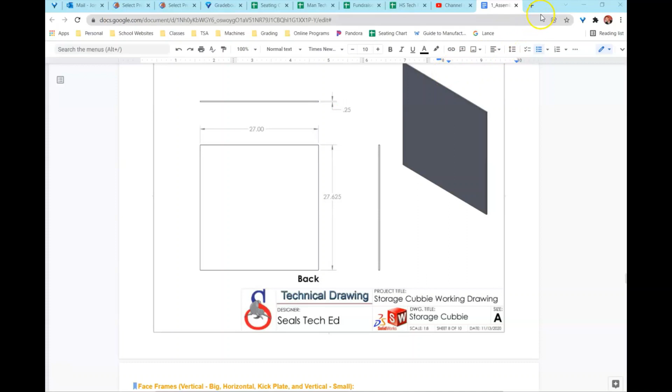I'm going to start with this simple back piece, and I'm going to pull this to my other screen. And in SolidWorks, I'm going to create a new part file. All of these parts are in IPS, or inches, so you can double check in the bottom right-hand corner that your screen defaults to that.

And since this is the back, I'm just going to draw this on the front plane, and I'll make the origin right here in the bottom left-hand corner. So I'm going to draw with my rectangle up to the right, and then it says it has an overall width of 27 and an overall height of 27.625.

Your computer is going to default to only 2 decimal places, but I will change it to show the exact amount of decimal places each time. That way, if you're busy and not hearing what I'm saying, you can actually see what it is on the screen. So it's 3 decimal places.

Features tab and hit Extrude. And again, it doesn't matter if you go forward or backwards, but this is going to be a 0.25 thickness.

It just says that it has a default material. You can change this to a wood type or whatever material you want. I'm just going to leave mine as default.

File, Save As. Find my Storage Cubbie folder, and I'm going to name this Back. And I can close out of that.

Let's continue here. The next piece is going to be all of the face frame pieces. Now, you might have no clue what a face frame is, so I'm going to scroll back and kind of explain. So on a cabinet or any type of furniture that you normally make, you have all of your side pieces and your internal pieces, but then they put this extra trim that goes on the front.

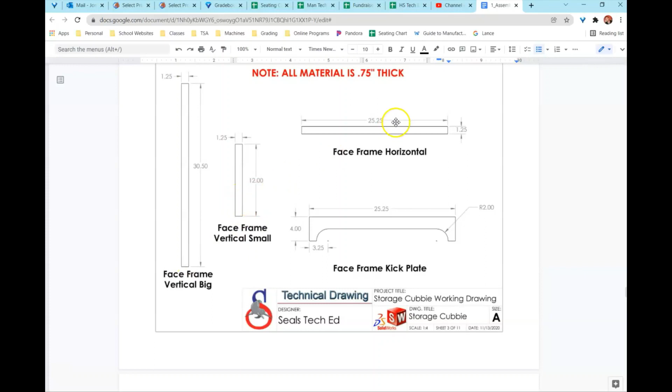So all of these tiny little pieces floating here are face frame pieces. Since they are all pretty small, I have them all drawn on just one page here. It says note all material thickness is 0.75. So you can see here there's the vertical face frame, the small one, the horizontal one, and then what's called the kick plate, and that's this bottom piece right here. So it's right here in the front.

So these are all individual part files. So once again in SolidWorks, let's make a new part.

I'm just going to sketch right here on the front plane, drawing with my rectangle tool from the origin up. I'm going to start on the left on that page. The first one here is the vertical big face frame piece, which has a height of 30.5 and an overall width of 1 1/4.

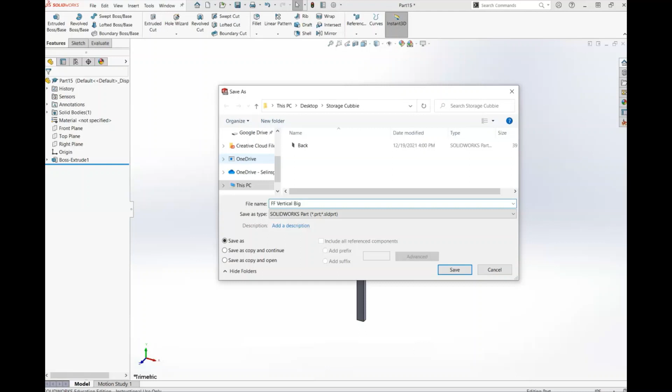Then I'll go to extrude it, and it says it has a material thickness of 0.75. I can save this, keeping the default settings. Instead of writing face frame each time, I'm just going to write FF, vertical big, and I saved it. Now you could make a new part, or since they're all extruded to the same thickness, I'm just going to go back and edit my original sketch.

But if this confuses you, just make a new part. So editing my original sketch, all I really need to do here to go to the vertical small one is change this 30.5 to 12. It has the exact same width and everything, and if I hit return, it's got the same thickness. Now I can hit File, Save As, and change this to vertical small. I think it's a lot faster to just edit my sketch when I have similar objects.

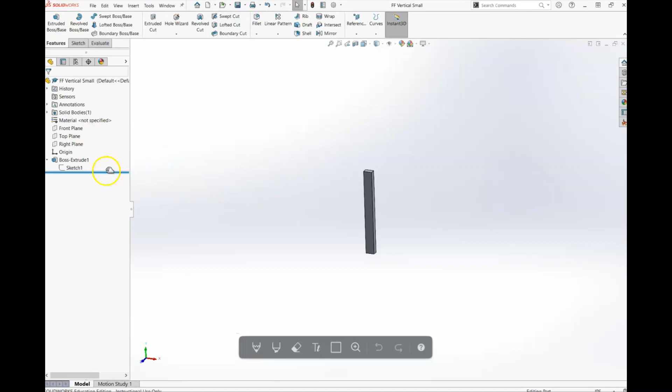So again, you can make a new part file, but I am going to just edit my sketch, and move on to the face frame horizontal piece. This time, since it's horizontal, the 12 needs to go to 1.25. The width of it, the top 1.25, gets changed to 25.25, so now it is lengthwise, going sideways. I can hit return because it's still got the same thickness. Then File, Save As, and this is the face frame horizontal.

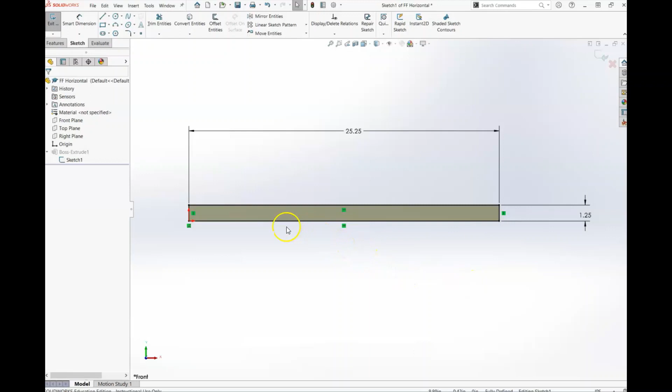And the last one is the kick plate. So I'll edit my sketch. Here we have a little bit of editing to do. You can do this in a lot of different ways, but if you notice the horizontal width is the exact same, and the height is obviously different, so all I'm going to do is draw the bottom part of this and then just trim. I'll change this to 4, that's the overall height, then draw my bottom part, and then trim this bottom line away.

Again, you can do this in a lot of different ways. The first thing I'll do is get my 3-point arc, and just somewhere on this line I'll click and draw an arc. I'll do the same thing over here. Get my line tool and connect the two. Hit escape, then I'm going to trim this bottom line. That's just how my mind works - maybe you wanted to do that a completely different way, but I think that's pretty quick.

Now we just need to change some of our relations. Where this arc goes into the line, that little dot, if you hold Shift and select the line and the arc, that's going to be tangent, and it's the same thing on the other side. I hit escape, held Shift again, selected the horizontal line and the other arc, and made that tangent too. You do want to make sure that this line going across is actually set to horizontal - mine was already defaulted to that, so you should change yours if it's not. This is still blue because we need to change some other things yet.

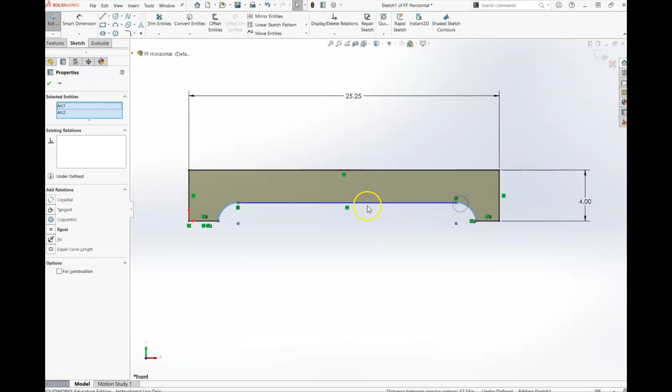The first thing we need to change is the size of these arcs, but I noticed that both of them are the same size, so I'll select both and set them to equal. Then I'm just going to dimension one. In the picture, it has the one on the right dimensioned, so I'll do that so it's easy to follow - that's going to be a measurement of 2 inches. Then it says from the far left side to this center point of the arc is 3.25.

That's going to be the same thing on both sides. Even though it doesn't show it on the actual picture, it's the same on both sides, so you can dimension the other one as well - from the center point to the far right line, 3.25. Now it's still blue, so if you move this around, grab a dot and start moving it, you can kind of see why.

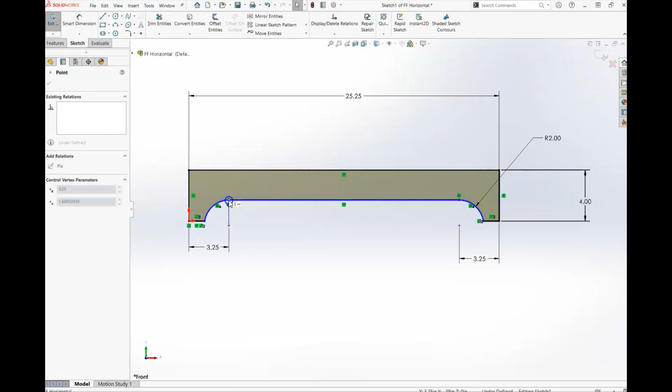The center points aren't really locked into place. These center points need to be straight across from this bottom horizontal line, so this is a perfect half circle or a quarter circle. I have that center point selected. I'll hold Shift and select this horizontal line, and make that coincident, and that should bring it down and lock it in.

It actually does it on both sides because this wraps up. It's tangent to a horizontal line and tangent again, so it automatically sets the other side as the same thing. Now this is fully defined, so we can hit return from sketch.

Once again, this is the same thickness of 0.75, so this should be fully defined. So we can go up to File and Save As, and this is the kick plate.

Okay, now I'm going to close out of this because the next two parts are completely different. The next two parts are the dividers.

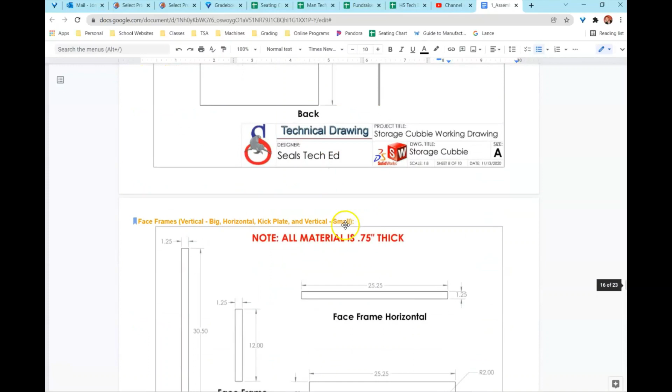You have a bottom divider and a top divider. If I scroll up here so you can see, these are the dividers that go in between the very base of it and the middle shelf and the top. So it's this one here and this one. Once again, it is number 6 and number 5.

If you want to draw things in the orientation that they are in the assembly, you can see that these are obviously facing the opposite direction. So instead of drawing on the front plane for this, I'm going to actually draw on the right plane so that they're already rotated for me.

Coming back down here, once again, we are going to just be putting the origin in the bottom left-hand corner. So in SOLIDWORKS, start a new part, and I'm going to be sketching on the right plane.

Now, you could take your line tool and sketch this whole entire thing out, but I look at it and I see there's one big rectangle and then a couple little ones at the top. So what I'll do is get my rectangle tool, click on the origin and draw a rectangle up. Then up here at the top, with my rectangle tool, I'll just draw 3 more.

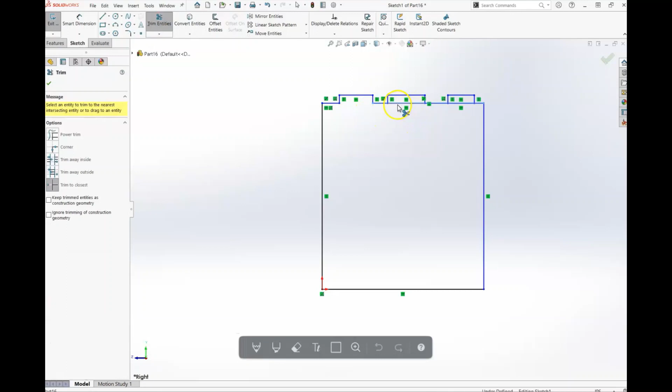Now the only thing with this is there's actually 2 lines right here, not just one, there's 2. So when we go to trim, you need to make sure that you click that spot twice. Now the nice thing about doing this is that you're actually going to see it sets all of these little lines to collinear already.

So that is a very nice little trick, because it saves you going through and setting all of those. Then it shows you here, there's a little diagram that says A equals B. So just to show you this little space here, I have that labeled as A, and B says A equals B. So these are equal.

And then the rest is pretty much dimensioned. So this outside says 1.2. This outside, 1.2, so they're also equal. And then the spacing in between is 1.4, so A and B are 1.4.

So just follow along here with me as far as the dimensions go. From the bottom all the way up to the top, we'll just do the overall height first. It says it's 13.225, kind of an odd number, and I'll explain why that is later. Then from the bottom to this small horizontal line is 12.875.

Now you notice here, the overall height adjusted only the middle one. That's because these top lines are not collinear. So let's hold in Shift and select the top 3 rectangles and make them collinear, and it should bring them back down to size.

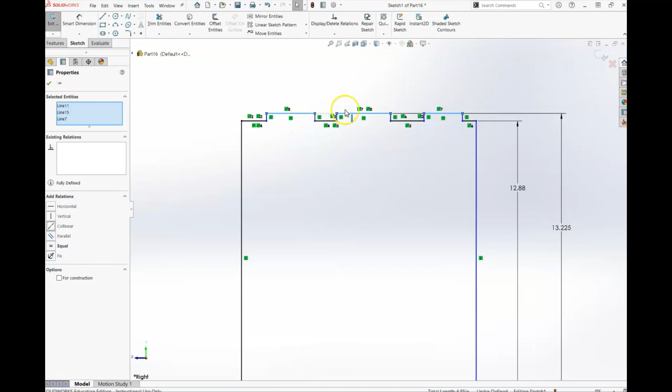Now, like it shows in the diagram, these 2 middle sections are equal, so I'll select both of those and set them to equal. And the outside 2 horizontal lines are also equal.

Okay, now I can change their measurements. So this one is 1.2. The space right here is 1.4. And the overall width, from the far left to the far right, is going to be 11.25.

So if I just look at why these are still blue, it shows that I can still slide these in. It doesn't necessarily show this in the diagram, but what that means is that these top pieces should also be set to equal.

Okay, so now we basically have equal spacing the whole way across, except for there are different lines that are equal to one another. So this is fully defined, there's nothing down here at the bottom that we need to do. So go to the Features tab and hit Extrude, and it shows that this is 0.75 thick.

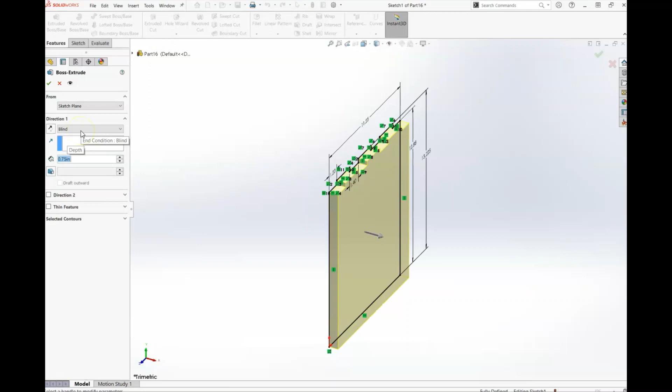I'm going to go File, Save As, and that's going to be my bottom divider. You could go through changing this or closing this and making a new part, but I like to just edit my sketch.

I'll bring this back in, and there's some things we need to delete. I'm going to delete this overall height and this measurement, the other overall height, and just take these dots and drag them down. Had to zoom in and zoom out a little bit to go further than that.

Before I add any dimensions, I'm going to bring this picture back over to show you why I did that. The top of this is very similar to the bottom. Same similar measurements, no measurements shown, so it's assuming these are the exact same as far as left and right. The only difference is that the overall height measurement here is slightly different - it's changed, and this time it measures from the bottom all the way up to the top, and this section down here actually has a defined height of 0.35.

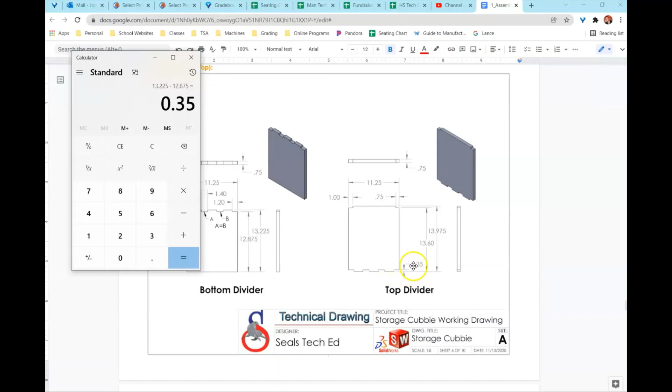If you open up a calculator, which I have done here, and type in these two measurements and subtract them, it is 0.35. So this is defined here, but since I dragged it all the way down and we're dimensioning from the bottom, I added in this 0.35 so it's easier for you to understand.

Looking at this picture, the one difference is that there's these little tiny cutouts up at the top, and they are not equal to one another - one of them is 1, the other is 0.75. So before I add in my measurements, I'm just going to cut those rectangles out.

I'll use the line tool for this, go over and up, hit escape, get my line tool again, do the same thing. Then I'll get trim entities and trim those corners off.

Green check. Now everything went blue because we trimmed the line that connects it to the origin, so as you can see, this can still move left or right. Before I dimension this, I want to reconnect those.

I'm going to select this line, hold in Shift, select the origin, and set them to coincident - saying if this line were to continue, it's going to hit that origin. We'll do the same thing with the top line and the origin, that way we have two defined lines we can work off of.

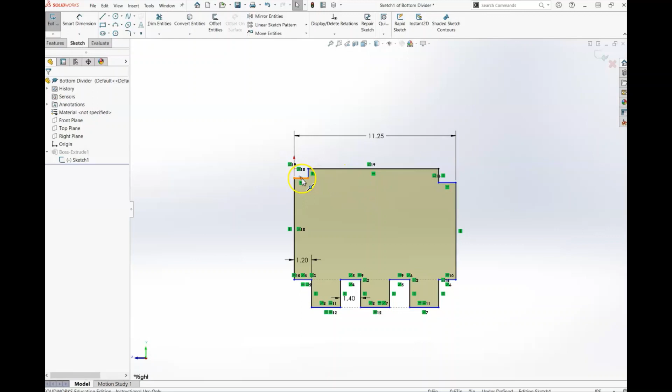This line here and the other little line are going to be collinear with one another, straight across from one another, and I can dimension these. We already said this is going to be 1 inch; the other one here is 0.75.

See why I was getting that warning - when I was drawing these lines, SolidWorks automatically projected that I wanted this line lined up with this corner, that's why there's a coincident right here, that line and this dot. I don't want that, so double check to make sure if you're getting any warnings. If you have some weird coincidences, these little symbols, just right click on them and hit delete - that's just something SolidWorks automatically put in that I didn't tell it to. Let's try that again. This now should be 0.75, and there you go, no warning, so that's good.

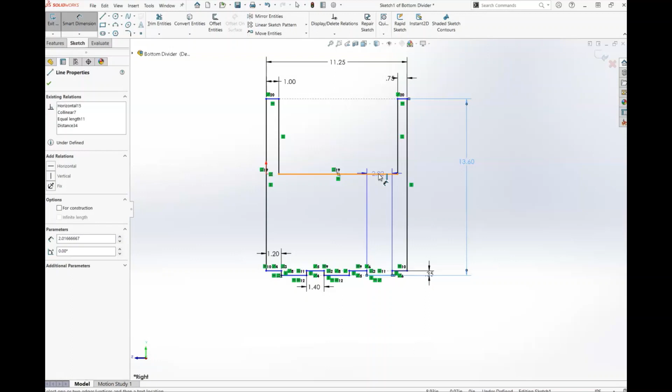Now I can do the overall heights. We already talked about this bottom little section being 0.35, and from the bottom all the way up to this little cutout, this little line, it's going to be 13.6. From the bottom up to this line, which I know is strange, it should correct itself - 13.975. All right, so it corrected itself.

The reason why it did what it did there on my screen is because we have this top line coincident with the origin - we didn't necessarily do that one. Since we were dimensioning from the bottom up, it just took this line and jumped it way up past the origin. But when we readjusted and told this measurement that it's bigger than the other one, it just brought that back down.

So long story short, this looks good. Okay, it's all fully defined now. So I can hit return from sketch, and this is already 0.75 thick. Then I can go file, save as, and save this as top divider.

I'm going to close out of that part and pull my screen back over here so you can see. Now moving on, this is the part where I would normally step in and we'd start working together. This is the top part, and it's a little more complicated. There are some detailed views, some fancy measurements, not just simple rectangular parts. This is a rectangle, but it's got a lot of fancy edges and cutouts to it. So we're going to do this together in this video as well.

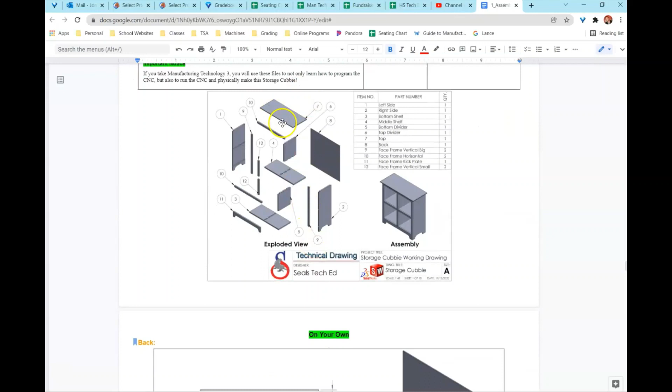And since this is the top part, okay, it's this piece right here, I'm going to draw it on the top plane. That makes sense. I'll just put the origin in the bottom left-hand corner. It doesn't have to be anything specific like in the middle.

The one thing I do want to point out, if you didn't see this note on your own, down here it says note TYP means typical. So anything that looks similar to a measurement labeled TYP is the same measurement. As you can see here, like 10.5 TYP, these aren't measured, but they look identical to it, so they are also the same measurement. Sometimes they show this in drawings, sometimes they do not. For instance, here, this probably could have been labeled TYP or similar to bottom divider. There could have been a little note there. I just kind of forgot to put that in.

So let's pull this to the other screen, start a new part. And once again, we are going to be sketching on the top plane this time. Get my rectangle tool, click on my origin, just draw out to the right.

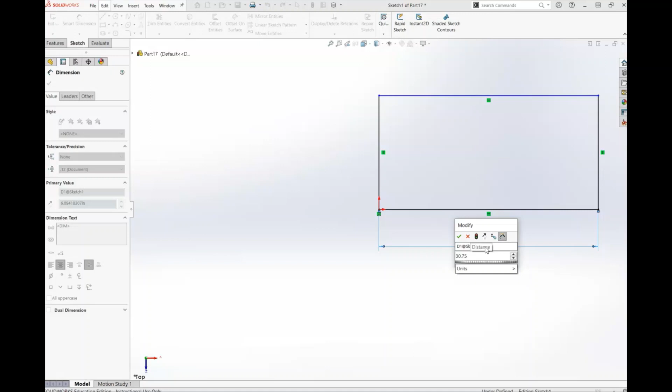The overall measurement of this, it says, is 30.75. And the overall height, or in this case depth, because we're looking down from the top view, is 13. Go to the Features tab and hit Extrude. It has a thickness of 0.75.

So I have my basic rectangle. Now there are a bunch of little steps we're going to do to get this fancy edge around it. The first step is looking at it and thinking through how we're going to do that. The fancy edge itself is only on 3 sides, both ends and just the front. It's not on the back because this is a piece of furniture, so the back would be flat so it can go up against the wall.

This fancy edge, if you know anything about woodworking, would be done with a router bit, just a little round over router bit. So we are going to be filleting the top, all the way over and there, to this measurement, 0.1875. And that's going to help us understand the bottom. So on your Features tab, get Fillet, set it to 0.1875, and click on this top edge here, the top front edge and the top left edge over there, and hit the green check. That's going to help us understand what's the bottom.

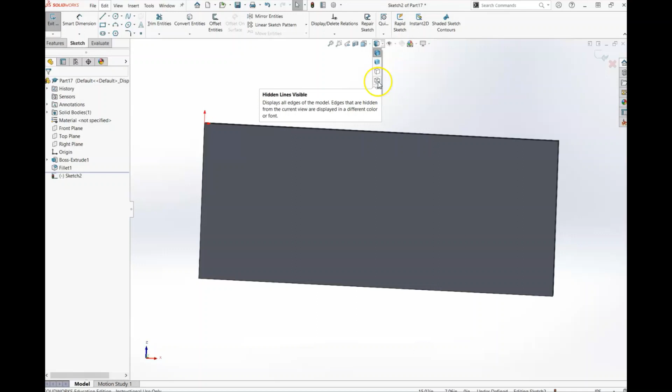I'm going to rotate around to the bottom, click on the bottom, and this is kind of hard to see right now because we're on the bottom, which sides are what. So if you didn't take note of how that rotated, something you could do is change your view. This is a solid display, but up here at the top you can change it to wireframe or wireframe with hidden lines, and that shows you where these dotted lines are.

If I go to a flat view, where these dotted lines are, that's where the actual filleted edges are. So I'm going to get my line tool, and on the far outside, I'm going to trace those same edges where those fillets are.

Okay, I'll hit Escape, meaning I'm not going to trace this bottom line because that is the back of the top piece. Kind of confusing here. So now that I have those 3 lines, I'll change my display style back to shaded with edges, just so it's solid. And I'm going to hit Return from Sketch.

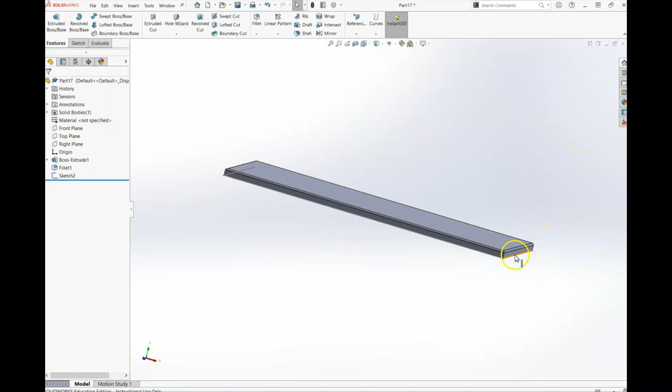If you know anything about the swept tool or the swept cut tool, it needs a path and a profile. So that is the path, okay? Those 3 edges. As you can see, it's traced on the bottom.

So I'm going to get my sketch tool once again. This time I'm going to rotate around to the back. So I should not see a filleted edge here. And I'm going to click on this flat back piece.

Okay, so this is now going to be the profile. Make sure you are on the back. You are not on the front. You should not have a fillet right here.

If you were to draw this right here, SolidWorks would get confused when you try to tell it to follow that path. It wouldn't know to cut left or to cut right. By doing it back here on the back, it's going to start at one edge of that path and wrap the whole way around.

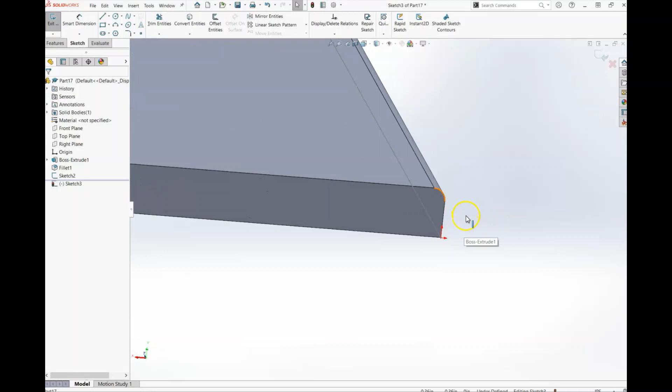So I'm going to zoom in down here to the bottom right-hand corner of this back piece. And I'm choosing the bottom right-hand corner because my detailed view is in that same fashion. It's going to the right.

Now, while we're looking at this, keep in mind, we actually need to draw the negative space. So what's going to be cut off? Yes, we are going to draw those arcs and this straight line, but we also need to connect it. So go over here to the corner and back up. This is the negative space. This is what's going to be cut off.

Okay, so start out just by getting your line tool. I'm going to go down on this horizontal line and just click somewhere. Go over to your origin and click, and up a little bit. You do not want to connect it to that yellow dot. That's the midpoint line, or where it turns into a fillet. You want to just be somewhere in between, somewhere on that line.

Now, if you are good with the line tool, I've showed you this trick before. You can move your mouse over that end dot and wiggle it a little bit, and it does turn into an arc. And if it's the wrong arc, you move back over that dot, and it changes it again. So you can kind of just draw, once again, wiggle, and it turns into an arc. And there's the shape that you want.

But if you're not good with the line tool, or you have no clue what I'm talking about, you can just hit escape once you get that vertical line drawn. Use your 3-point arc, and you can just manually draw that in.

And we'll have to draw this one. Let me try that again. Go from there to here. And then you connect them with the line tool.

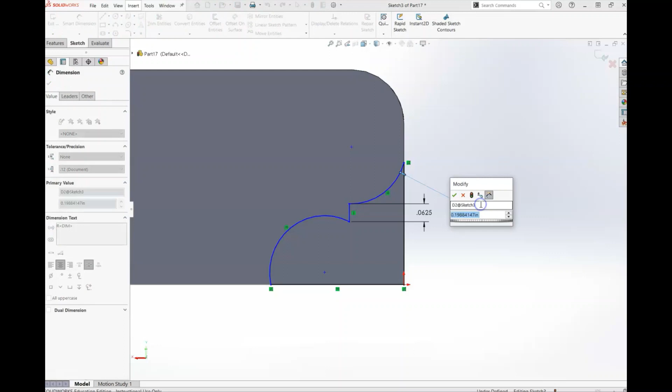It says that the arcs are typical, so there's no measurement on there. That's because it's measured the fillet, but these are going to be the same. So we'll just set that to 0.1875, just like the fillet was.

And now there's really no other measurements there. So we just need to change our relations. So hopefully this would stick out to you by now, but the center points are kind of just floating around. They're not anywhere specific, and that's what we need to fix.

So let's set this center point here, or select that center point, hold in Shift and the bottom line, and we're going to make them coincident so it connects to it. Okay, and then I'll just click out in this white space. Then I'll click that center point again, hold in Shift, and I'm going to click the small vertical line, and I'll set those coincident. So by doing that, it makes this a quarter circle, a perfect quarter circle.

I'm going to do that same thing for the top. So the center, hold in Shift, and the vertical line, make that coincident. It will straighten that out.

You can select that center point again, and this dot, and make those horizontal. Now why are we doing horizontal? Well, because it's straight across from it. This center point isn't connected to a line like this one is.

That should fix it. If you didn't want to do horizontal, or maybe your computer already defaulted to it, another way of doing this is to make this line and the side line tangent to one another. It's still making that dot horizontal because it's a perfect quarter circle. So either way, this should be fully defined now.

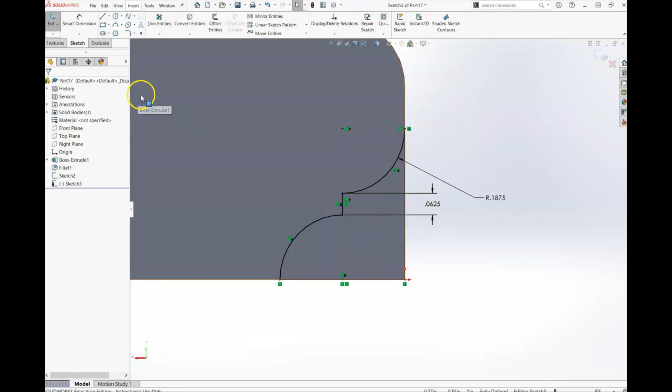So now we can hit return from sketch, and we have our profile. It's all closed in, and we have a path.

So we'll go up here to the Features tab and Swept Cut. Yours might already have something selected. I clicked out in the white space just to unselect it so I could explain this. So the first thing it's asking us for is the profile, which is going to be this sketch. The second thing is the path.

If you rotate around, underneath you should have this edge. If you don't know what edge to click on, you can always hit the drop down here, and it's going to be sketch 2, the second sketch. You see now it can follow that the whole way around.

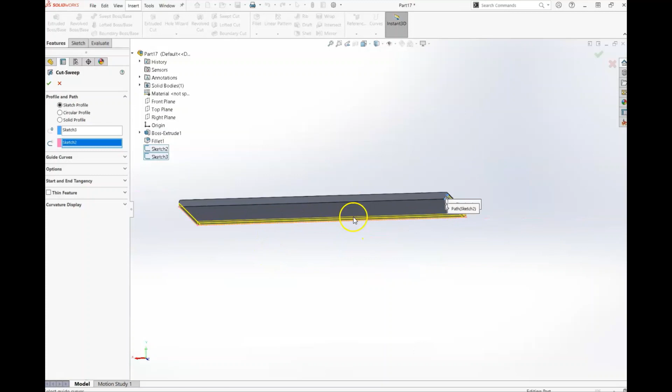And this is Swept Cut. Green check, and it cuts that fancy edge the whole way around, which is pretty cool. So that looks nice.

So the next thing we need to do is actually cut out these bottom pieces. Now in real life, the way you would do this would be by using a machine called a CNC that would actually cut these automatically to the actual depth that you want and everything.

Doing this by hand, you would have to set up a whole bunch of jigs and fixtures because this doesn't go all the way to the edge, as you can see. So there's also a little back lip here that's removed.

That little tiny back lip, so as you can see, and I'll zoom in just so you can see it a little bit better. This tiny rectangle that's removed, that is where the back piece goes.

Keep in mind we're looking at this from the top view. And these three pieces are where you have the left wall, the right wall, and that middle divider.

So just to come up here and show you, that top piece goes up in, this goes up in, the divider goes up in.

I'll zoom back out because this is hard to see. So that is all done on the bottom, that's why you can't see it here.

We'll pull this over. It's good to do that first section, the filleting and the routing, first, because when we draw on the bottom, it's going to flip this and rotate it around. So I'm going to go underneath here.

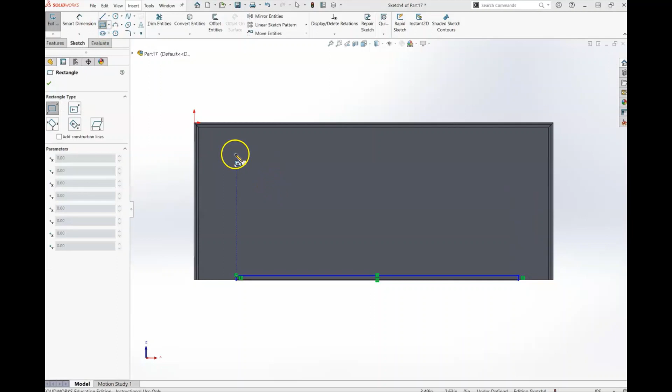So the rectangle tool, and I'll draw across. Then I'm going to draw another rectangle over here and one in the middle. I'm not going to bother drawing this one because I'm actually going to mirror this rectangle on the left all the way over to the right.

So let's get this bottom rectangle in place and to the correct size. From the very back line or the bottom line, its thickness is only 0.25 - the same thickness as our backboard. The overall length of it is 27. And then it just needs to be centered.

In order to center it, we can go to the far left edge. Make sure you're clicking on the correct edge, so it's the far left to this first vertical line.

Okay, and that's going to be 1.875, and now it is centered on the top. Having that centered first is actually going to help us.

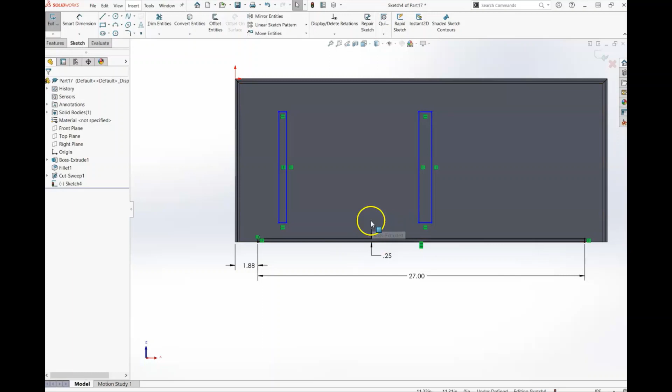I'm going to hit Escape and get my line tool and check the box for construction. You can do this in a lot of different ways, but the easiest way is just moving your mouse over this top line and that midpoint pops up. If I select that midpoint and draw up to the midpoint of this bottom line, hit Escape, then make my construction line vertical, it automatically centers this rectangle to the overall top. That's because this bottom piece where my back's going to go is already centered, so by this being a vertical line, this has to be centered. It's just a little trick there using a construction line.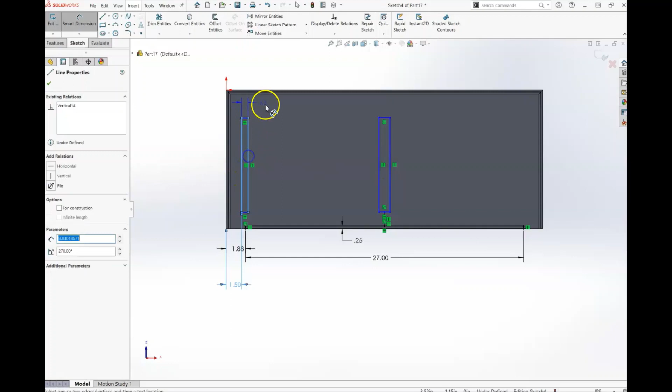So now I can go about dimensioning these. From the far left edge over to the first line here, it says that is 1.5. The overall thickness it shows for this middle piece, but the overall thickness of this is 0.75. The overall height is 10.5.

And it's still blue. Find the measurement that keeps this from moving up and down. So if I bring this back over, that measurement is this 2 inches right here, and it says TYP because all 3 of these cutouts are all 2 inches, so they're all typically 2 inches away from the front.

Now, when I say the front, this is actually a little confusing for us because we are drawing this upside down. So you can see this is the routed edge right here, or that edge that we use the swept cut—basically the edge that has this fanciness on it. It is not from the edge that has that back piece.

So when we dimension this, we are not going to be putting the 2 inches in here that we see. We're actually going to be doing it from way up here. So you want to go from the very top edge to that line, and that's going to be 2 inches because we're drawing this upside down.

So now that rectangle is fully defined. So this is pretty easy. Let's select the vertical line of this middle rectangle and one of the vertical lines of the rectangle that's defined, and we'll make them equal. So now they're going to be the same height.

We can select one of the horizontal lines and its opposing horizontal line. We can not only make them equal, but we can also make them collinear, so they're straight across from one another. And it will fully define that middle piece.

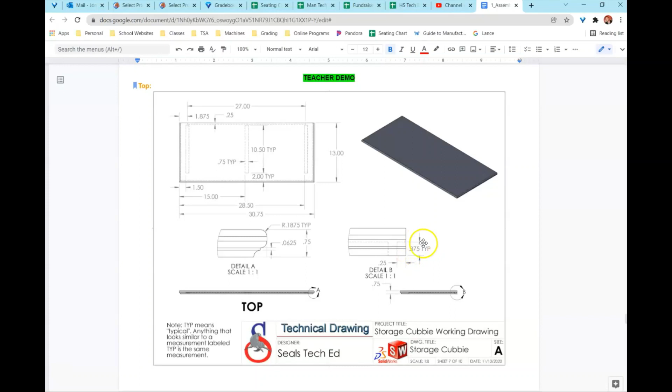That's how much we're going to cut this in, 0.375. So you can change your measurement to 0.375. Green check, and now that is finished. So 0.375 is exactly half of which is the thickness of this.

So we're going to save this part as top. File, Save As, and you can save this as top. Okay, then we can close out, and I will start a new part.

And now we're going to do the left side. So again, since this is a side, we can sketch on our side plane, so our right plane. This is going to be the left side, and I'll put my origin in the bottom left-hand corner.

So I'm just going to use the line tool here. You can use that trick that I showed you earlier, a rectangle and a bunch of trimming, but I think it's kind of pointless to do it in this—I don't think it saves you more time. So I'm just going to use my line tool to kind of sketch this out.

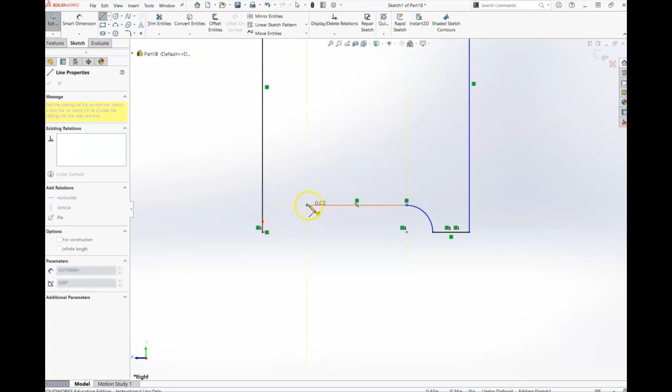Okay, if you're good with the arc tool, or with the line tool, you can wiggle over that dot and it comes up, turning into an arc. If you're not good with that, you can just use the 3-point arc.

So you want a shape that somewhat looks like that. Don't worry about the stuff on the inside yet.

Okay, so up here you have 2 little cutouts. We're going to select the bottom horizontal line of this one and make them collinear.

And if I look at the picture, just to bring this over, you can see here it says this is 1 inch. And the back goes over 10.5, but the overall is 11.5. So that tells me that is also 1 inch.

So both of these cutouts are the same, so that means we can set these lines also to equal, and I can dimension one of them. Okay, that's going to be 1.

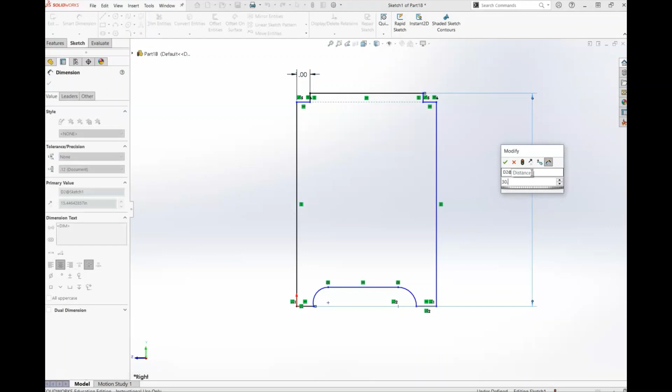So the overall height, from the top all the way down to the bottom, however you want to do that, that is going to be 30.875. And that should completely screw up your picture, kind of grows that top part a lot.

Okay, so now if we go to one of these horizontal lines in the bottom, that's going to be 30.5. That should fix a lot of that.

The overall width, from the far left line to the far right line, the overall width is going to be 11.5. That should make a lot of the top black, fully defined, just this bottom part that's not.

So I'm going to zoom into the bottom. First things first, let's make sure this line is a horizontal line and that it's tangent at both connection points.

So if it's not, select the arc and the line, make it tangent, do it at both spots. I already have all of that set - it automatically did that for me.

And these are perfect quarter circles, so that means this center point, hold shift, and this bottom horizontal line is going to be coincident, so it drops it down, and it automatically does that down here for the other one. Okay, so now we can go ahead and dimension some of this.

So this arc and this arc should be set to equal. And the arc has a measurement of 2, so you can see there's a detailed view to the far right on that page - that is 2.

So from the front edge into this center point, that is going to be 3.75. And from the front left edge to the other center point, that is a total of 7. So when it does that, you see that it stretches this back part a little bit.

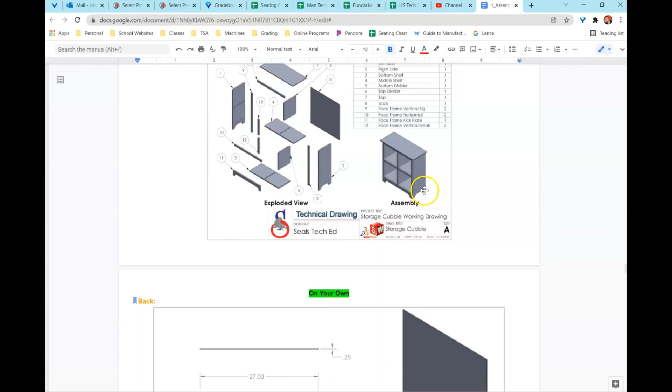So when you have that face frame on there, from the side view, the distance from the very front to this cutout is the same as that one. So we're actually compensating for the face frame that we're going to attach later on.

So just to show you, that's 0.375, or this is 1.75. This is actually 2.5, so 1.75 plus 0.75 is 2.5. A lot of math there at once. So we have that whole thing.

I think the easiest way for students to do this would be just to extrude this. So I'll go to the Features tab and hit Extrude. I'm going to make that 0.75 thick.

Okay, now I'm going to sketch on this inside surface. And now I can draw those other lines.

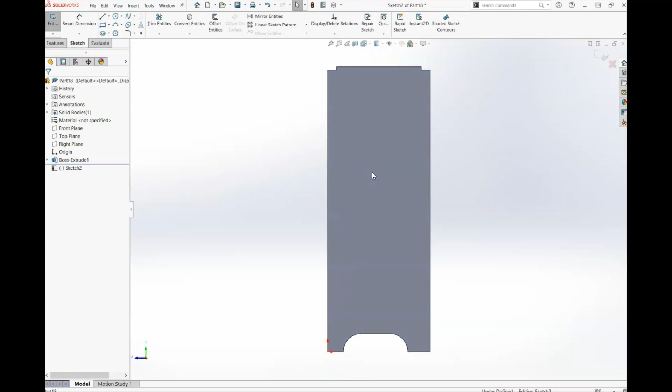So there is a rectangle, it comes down the whole back. So I'll select there and just kind of come down to about here and stop.

Go from that corner over to the front. And there's another one in the middle.

Okay, now you can see they're divided. So let's get our trim entities. Trim there, let's trim here. So 2 clicks because there's 2 lines on top of one another.

All right, the only thing I see that might cause us problems is this dot, because this is 2 lines now instead of 1. So what I would like to do to fix that is just select that dot, select this vertical line, and let's make them coincident, so it thinks that they are lined up.

Okay, now we can go ahead and dimension this. And this is actually all on the top view.

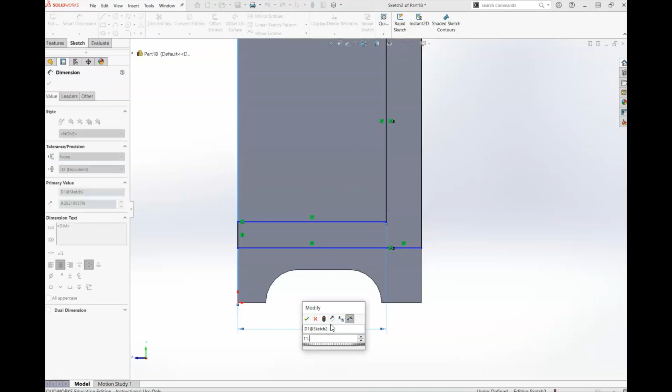So from the far left to this line right here is 11.25, meaning the space left here is 0.25 since the overall width was 11.5, and that's just enough for our back piece to slide in there. From the bottom to this first line it's 3.25, and to the next line it's 4, so that's 0.75 in between, which is our bottom shelf that's going to fit in there.

So from the bottom up to this line is 16.5, and from the bottom up to the next line is 17.25. So that is now fully defined.

So we go to the Features tab and Cut Extrude, and we are going to cut that a total of 0.375, half the distance, so all of it gets cut in. I can see that on my right view, 0.375, showing where those cutouts are.

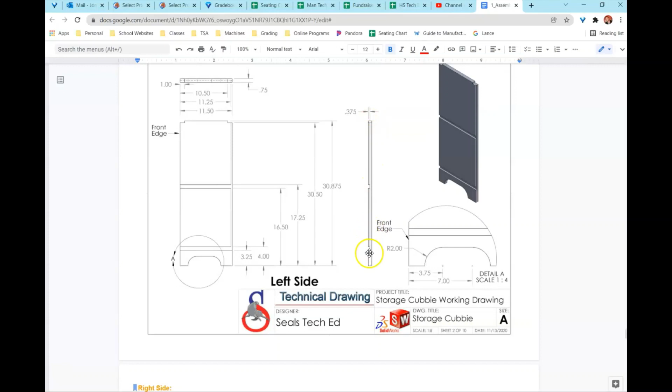So this part is now done, this is the left side. So we are going to save this - File, Save As, and let's name this left side. Okay, I'm going to close out of this part.

If I'm looking ahead here, it says for the right side, it's a mirror image of the left, and it said to see the left side for measurements, but you really don't need that, and here's why. At the very beginning I explained we're going to do some cabinetry design. If you haven't noticed, you see all these little cutouts - we're figuring out how the other pieces will interlock and go inside of the side walls. We're not just going to butt join them or lean them up and run a screw through; they're actually going to sit inside the side pieces and get glued in there. So that's a little bit of cabinet design.

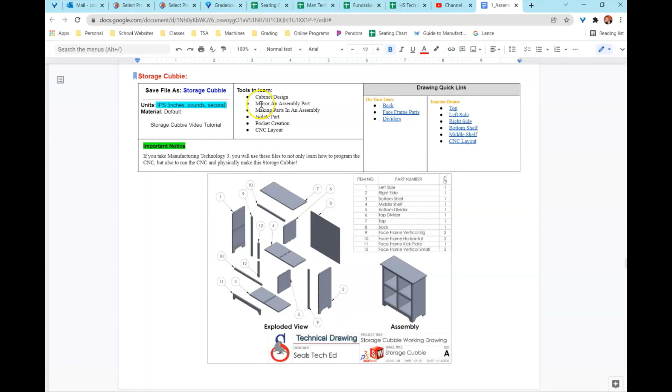So the next thing we're doing here is mirroring an assembly part, not just a normal part, an assembly part. So at this point we're actually going to start our assembly. Let's hit New and Assembly.

First part we want to bring in is just the top. We're not going to confuse ourselves by bringing in all of this. When you bring that in, it's going to fix it because that's going to be the only one. Now we'll insert, and we're going to bring in the left side.

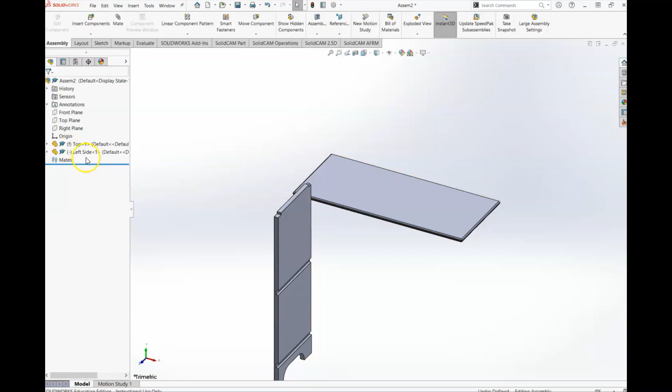Notice I brought them in separately. If you brought these two in together, you'd want to right-click and float the side, then right-click and fix the top, because it comes in alphabetically, so the left side would come in first, and whatever your first one is automatically gets fixed.

So this is in the correct orientation as well - as you can see, this little back sliver is towards the back. So let's go ahead and mate this. I'm just going to hit mate.

And the top of this top sliver - not here, the top part - and if you rotate around underneath, it goes right up inside of there. So make sure you're clicking on the correct parts. So now that's the correct height.

Okay, and this can still move left and right. So I'm going to select this inside wall, rotate around, and it would touch that wall right there. So now left and right, it's good.

You would think you'd just go from the front, but I think it's easiest if you just rotate around from the back. That way you're not mistakenly clicking on something of that fillet or the swept cut edge. So the flat back here of the top and this back piece, and it slides right in.

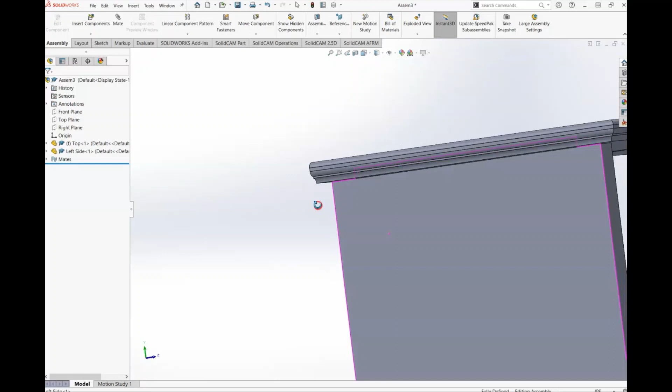Green check - now that this is fully mated, I want to rotate around here and show you why we made some of the things the way we did. You don't have to do this if you don't want to, you can just watch the screen, but if you want to learn something new, you can as well.

So I'm going to select this surface, and up here where this little bar goes across, about the fourth icon in, it says Section View. A section view temporarily removes some of the material so we can see inside. When I click on that and rotate to the side, there's a little arrow - I'm just going to drag this backwards just a hair. What I want to see is this gap here, and then hit the green check.

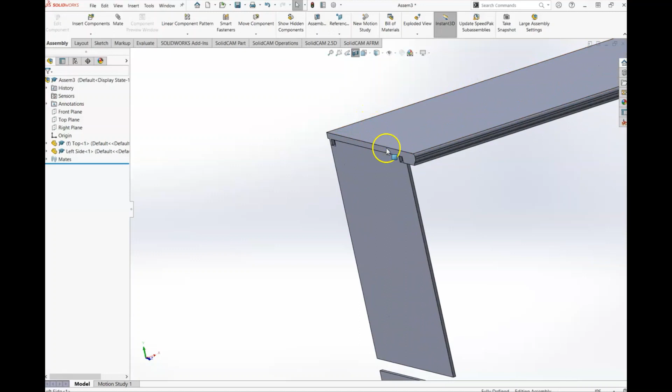So it's going to look like you cut some of your project off, like part of it. But it's just a temporary thing, just a viewing thing.

I wanted to show you this because if you look inside here, you might be wondering, why is there this humongous gap? Why isn't this just cut perfect? Well, there's an actual explanation for this.

This is kind of hard to demonstrate unless I had a real picture of it, but maybe I can explain. The CNC machine uses a round cutting blade, a round bit. It's like a drill bit basically with a flat end. So it does not have the ability to make these perfect square corners on the inside.

What you have to picture here is for it to cut out this corner on the top, it's going to actually be rounded like this. It's going to have like a quarter inch round, because the bit we would probably use is a quarter inch in diameter. So that means it would have a quarter inch round, kind of rounded here.

Same thing with this piece, it would kind of be rounded to about here. So there's a tiny little bit in between those rounds where those rounds would not hit one another.

Now, yes, you could chisel those out or file them out. But if you want to just take this off the CNC and put it together right away like a puzzle, you need to compensate for the, I guess, mistake, or for the machining of the CNC, which is going to leave this little round bit.

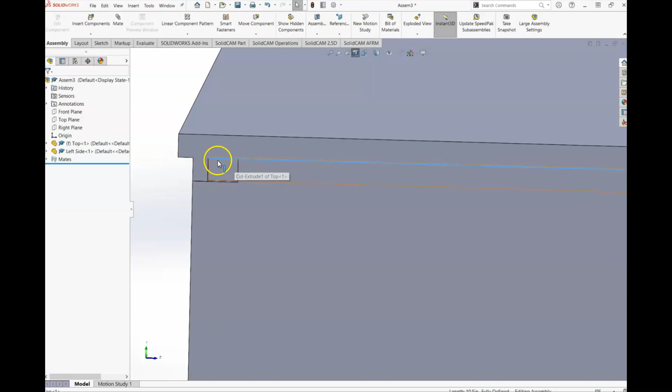So we have these gaps in here because in reality you'd have a curve here, and there's kind of just enough space there for it to have a little bit of wiggle room and for some glue to be inserted in there as well. So that is why we made it like that.

So now that we have this left side on, and again, sorry if you didn't turn off your section view, you can turn it off now. But now that we have this in, we are actually going to go through the process of what this says here. It says mirroring an assembly part.

In the past, I'm sure a lot of you would have tried to put a plane and mirror this over. Again, I don't want you to do this, but I will just show you. If I went to plane, reference geometry plane, and made a plane in the middle — which again is not what we're going to be doing — and tried to mirror this part across that plane, you'll see how it messes up.

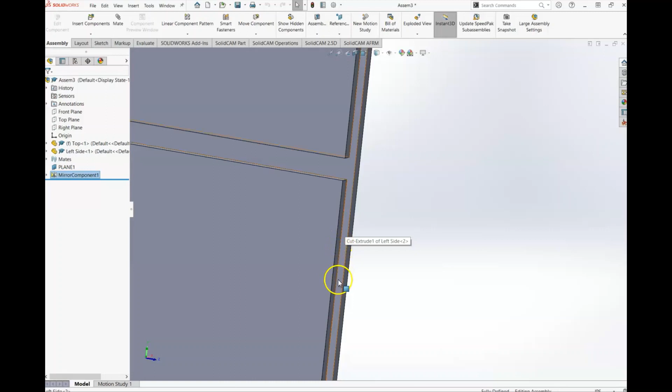See how it puts the back here? Well, we don't want the back there, we want it back here. So it's not necessarily the mirrored image that we want. In this case, it's just like a mirror — it reflects it, but it kind of rotates it as well. So that is not what we want to do.

What we actually want is a completely new part. Now, yes, you could go through and hit a new part file and make an all new part. But the easier way of doing this, which is a little trick I've never shown you before, is to open this part up by itself. You could right click and hit open part if you don't already have it open.

And when it opens, you need to select the surface that you want to mirror it across. In this case, we want to mirror to the right, not to the left. So we're going to click this inside wall, the side that has these cutouts. I'm just going to click on that, then go up to Insert, and halfway down there's Mirror Part.

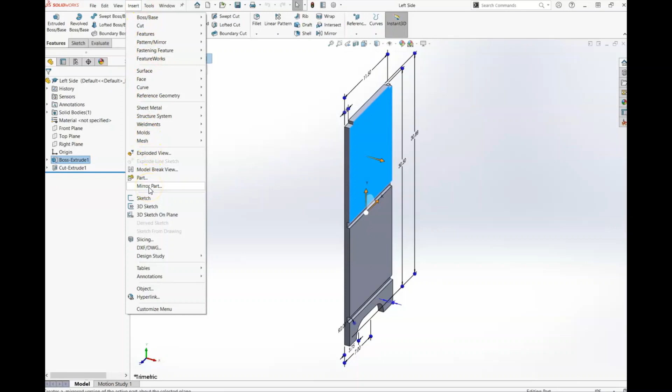It's got a whole bunch of different settings over here, but just hit the green check. What happens is it mirrors this entire thing, and as you can see, the back is towards the back where we want it. This is made specifically for assemblies and doing what we are doing right now.

So this right now says left side mirrored. What we want to do is hit File, Save As, and we are going to change this to right side.

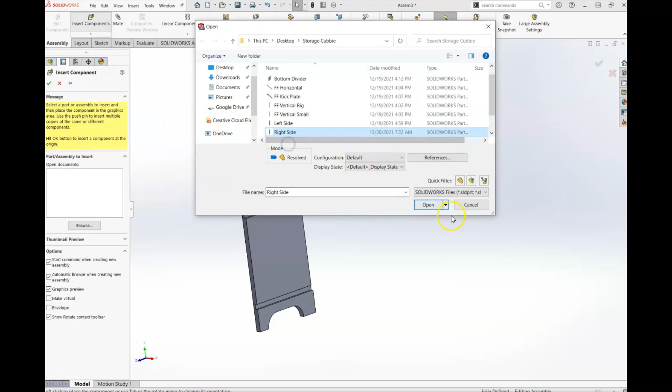Okay, now we can close out of this part, and back at our assembly, we can hit Insert Component and insert the right side. Now this is a perfect mirrored image with the back cut out towards the back.

So go ahead and mate this in just like we did before. Up underneath the surface that it's going to touch, and the top of it, green check. The surface inside wall of this piece, rotate around, and the little inside piece that it would touch, green check. Then again, you can rotate around to the back, and do the back of the top and the back of your piece. You could also mate this to your other side so the bottoms are flush and the backs are flush. That's easy as well. Green check, so now this is in here perfect.

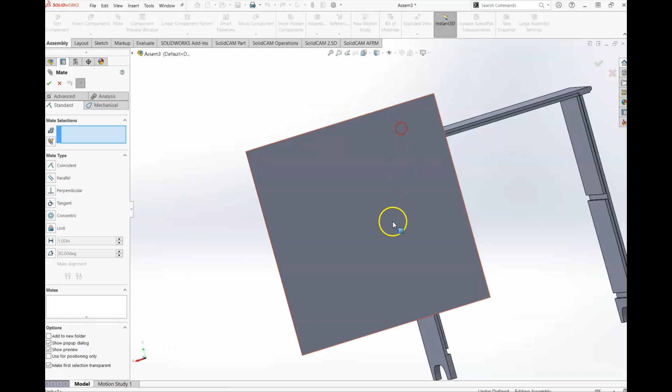All right, let's go ahead and bring in our back piece. This just gets inserted right in there. I'm just going to select the back of it and the very back of one of my side pieces so that they are flush, green check.

Select the top of this, and rotate around up underneath the piece that it's going to touch, which is right here, so it's got the correct height. And then the side to the side, so it slides over. Now that back piece is inserted in there perfect.

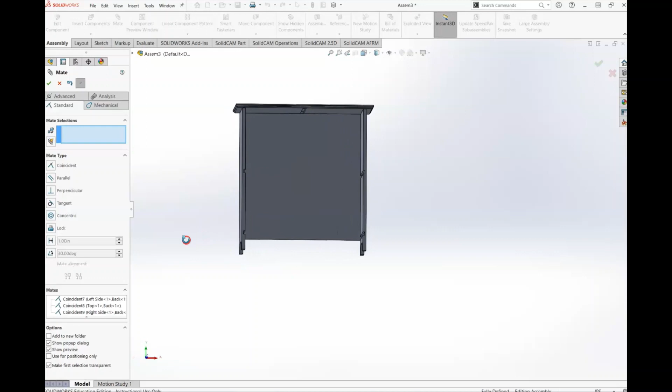And yeah, there is a little gap down here at the bottom. That's how a lot of furniture is made. Okay, so the back is now in there. This is where I would like to save, just in case things go crazy or delete, or sometimes SOLIDWORKS likes to crash.

So this is our storage cubby. And from here, the next little thing we're going to learn is making parts in an assembly - making parts in an assembly. So we are moving on to creating the shelves now, the bottom shelf and the middle shelf.

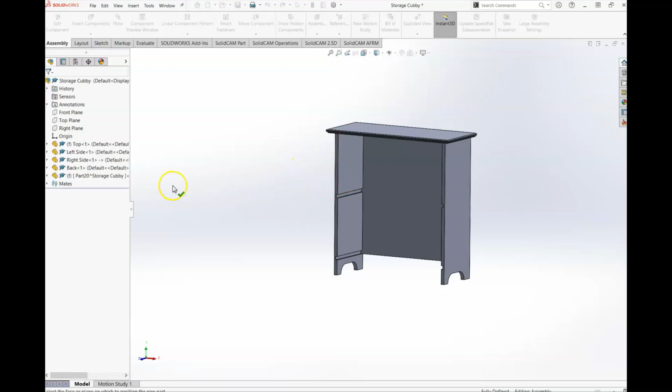To create these, you could make new part files. These are pretty easy to make, but of course I want to teach you something new. Up here where it says Insert Component, there's a little drop down that says New Part. This is asking us right now where we want to make a new part, on what surface. I am going to click on this front face of one of my side pieces.

Okay, so it kind of grays out everything, or puts everything else in wireframe, and you are now creating a part file. You can see your menu changed up here at the top. So I'm going to hit Control 8, which is Normal To, and that gives me this nice side view here. The next part we are actually creating is the bottom shelf, not the middle shelf.

So the bottom shelf fits right in here in this gap. I'm just going to get my rectangle tool and zoom in. The nice thing with making parts in the assembly is you have all the other parts to kind of connect to. So I went from that corner to its opposite corner.

Okay, and now this is fully defined with no measurements whatsoever, even though - just to double check here - this is 27 long, just to show you, this is going to be 27 long. So even though we didn't put any measurements in, it is fully defined. We can go to the Features tab and hit Extrude.

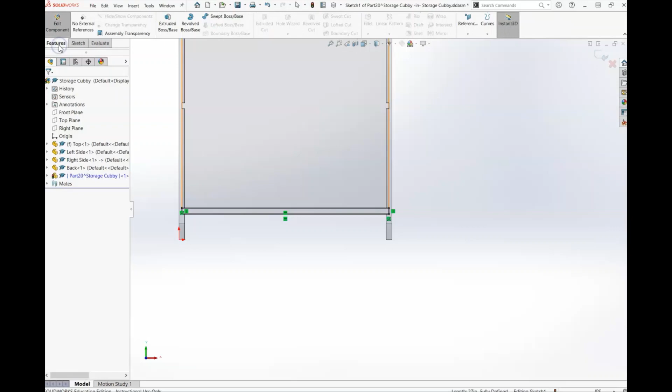And when I rotate around here, you can see the direction that you're extruding. If you change the direction, okay so it's going backwards, and you change it from blind to up to surface, it's going to go back until it hits this piece. So it's asking us what surface - if you click on the back, it's going to extrude until it hits that. Then you can hit the green check.

Okay, so there is our bottom shelf. We just need to have that cut out now. So you could have done this all in that sketch, but I kind of forgot. I'm going to select Sketch, click on this front surface here, and I just need to have a rectangle for this to get cut out, so I'm just going to use my rectangle tool.

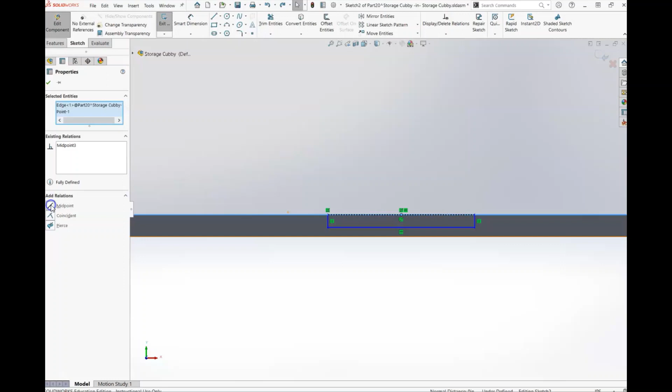If you select the top line and move your mouse over it, you'll see the yellow dot in the middle pops up. So I'm just going to select that dot now, hold in Shift and select the top of this piece, and we can actually set it to midpoint. What it'll do is take that midpoint and lock it into the midpoint of that top line, so it kind of centers it. Now we can go ahead and dimension this - this is 3/4 of an inch wide, so 0.75, and it only goes down 0.375.

0.375, it goes down half. Remember, these are the same measurements we've been using the entire time, because the material thickness is 0.75 for that middle shelf, and it's going down halfway. Extrude, or our Features tab, Extrude Cut, and we can hit Through All.

Okay, it'll go through our part. We can hit the green check. So I believe now that is the bottom shelf. That is all done. Okay, so up here in the top right, there's Return for Part. And there's our part. Let's do the same thing here for the middle shelf.

So Insert, New Part. Select on that front surface. Control 8, so it goes to the flat view. Rectangle here, go from corner to corner. Features tab, Extrude. I'm going to change this from blind to up to surface. If I rotate around, I can click on the back wall.

Green check. And now we need those holes in the middle. So if I look back at this, there's some odd holes here in the middle. Okay, so this is actually where I am planning on showing you how to isolate a part. Okay, isolate a part. So right now you still have all of this other stuff.

We need to sketch in the middle. This cut was pretty easy because we could just cut it right through, but sketching right in the middle means you're going to be looking through a whole bunch of stuff. So the easy way of doing this, if you right click on this part, there's isolate, and it will temporarily turn off or hide everything else.

Okay, so there's this little box up here. We're going to move out of our way, and now we can sketch on this flat surface, and now we just need to draw those 3 rectangles. So I'll just get the rectangle tool, draw 3 rectangles here.

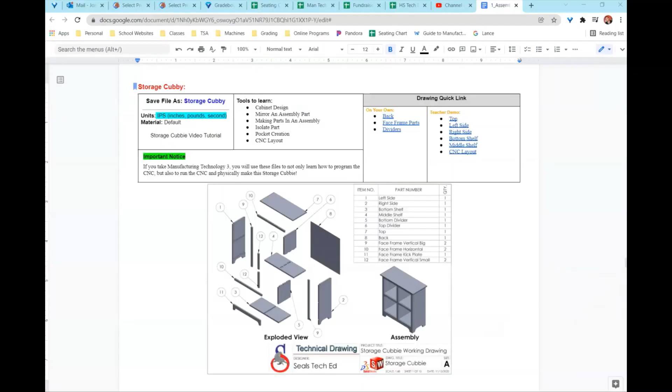And let's look back at our picture. Our picture shows that A, B, and C all equal one another, so the lengths of these are all the same. The thickness here is obviously going to be 0.75. It does have the measurements from one side to the other, and it looks like there is an inch in between the whole way up.

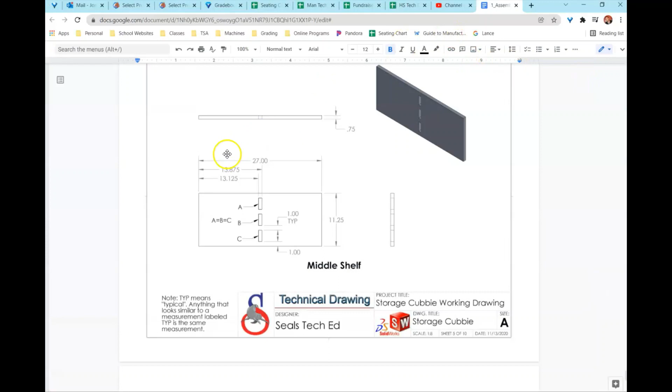Okay, so let's hit escape off of our rectangle tool. I'm going to select, by holding in shift, the 3 left side lines. I'm going to make them collinear and equal, okay, so that they're all lined up, collinear and equal. And I'm going to get my dimension tool, and from this side to that first line, if we look at that measurement here, this is what we're doing, 13.125, 13.125.

I'll change my decimal places so you can see it. If you want to follow the picture, you can. So from the left side all the way to the right side, that's going to be 13.875. You could also just set one of these to 0.75 because they're all 3/4 of an inch thick.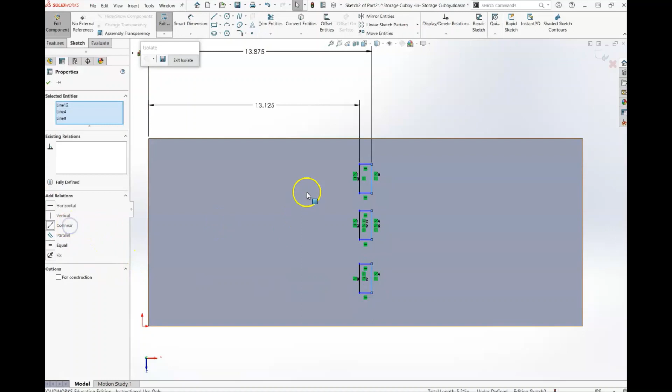Okay, so we only made the left side collinear. We did not make the right side collinear. So now we can go ahead and do that. Select all 3 of those, make them collinear. Now we just need to change the spacing in between.

So you could dimension 1 inch all the way down through. What I like to do is actually get construction lines, and I draw from the end to here, and I just put construction lines in between. The reason I do that is because I try to stay away from putting as many dimensions in as possible. That way, if you ever change something, it will automatically change all your other parts as well.

So these are all 1 inch. So if I select all 4 of these and set them to equal, okay, it'll space them all out, and now all I have to do is dimension one of them to 1 inch, and it automatically changes the rest.

Okay, so now we can go to the Features tab and Extrude Cut, and let's change this from blind to through all, and hit the green check. Okay, now that we're done with this part, we can hit Exit Isolate, and it comes back to seeing everything. We can hit Return from Part, and now we have our middle shelf.

So let's save these, and the way of saving these first is if we come over here and we right click on the first part that we made, there should be Rename Part, and that's going to be Bottom Shelf.

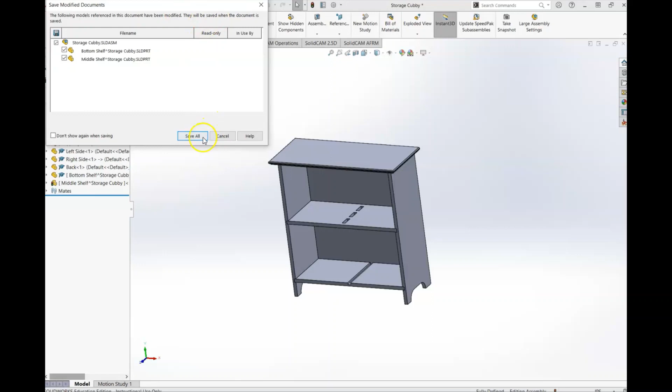Hit Save All, and it's going to ask you if you want internal or external parts. If you do internal, it's only going to be inside the assembly, not individual part files. If you want it to be external, so they have their own part files, you hit external. We actually do want these external, and I'll explain why later on. So set them to external, and hit OK. Now we have those saved as well.

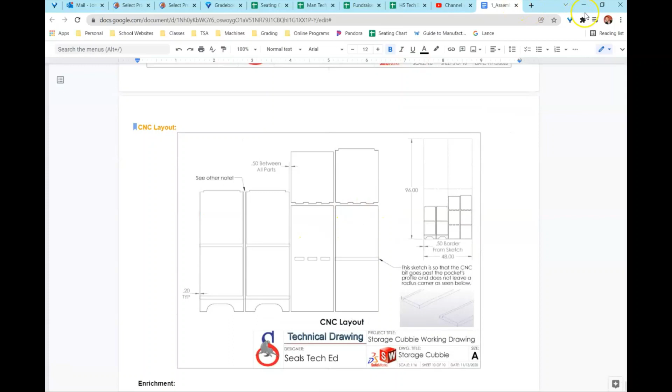So bringing this document back over, you can now see we actually have all of our parts made. This bottom part here is just an extra thing that we're going to be doing later. So we can actually go ahead and finish our assembly.

Let's go up to Insert Component, and let's bring in our dividers first. So we need our bottom divider and our top divider. I'm going to hold in Control, not Shift, because Shift will select all of those. Hold in Control, and you'll select both of them at the same time. Okay, that's our bottom, and this is our top.

So I'll get my Mate tool, and I'll select the side wall of this and the side that it's going to touch in this little cutout. Green check. Front wall of this and the front wall of the bottom shelf, so it slides back, green check.

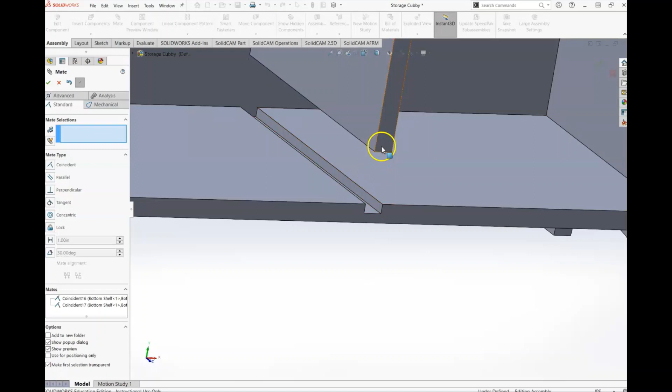And then you're going to have to probably drag this up a little bit. So I just clicked and held and dragged, and then where it goes onto, so in between, and green check. Notice I did this all off the bottom, and the top automatically goes together.

Now this is another little intricate thing you can kind of see. Remember we talked about before about the bit the CNC is going to have and how it has to have a little bit of excess here. So I'm going to turn my top off just for explanation reasons so you can see there's some excess here. There would be a little rounded edge because it cannot make that squared off corner of this piece. It can't make this. So this is actually rounded right here. So for this piece to fit in here, there needs to be a little bit of excess.

And we actually have this only going up part way because the next part's going to fit right on top as well. Okay, so I'm going to turn my top back on, I turned that off on accident. And we can go ahead and mate this.

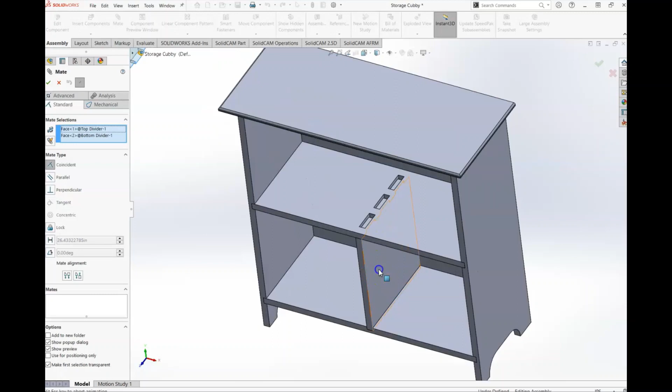So for the mate, I'll select the side wall of this. And I'm actually just going to do the side of this piece because it's already set to being even with those, it's just a lot easier to click. I'll also do the front of this and the front of this piece, a lot easier to click.

And now it just needs to be dragged up. So while it's in this kind of position, I'll click here, rotate around to where it's going to be touching, and it slides right up in there. Okay, so now we have kind of the dividers all in place.

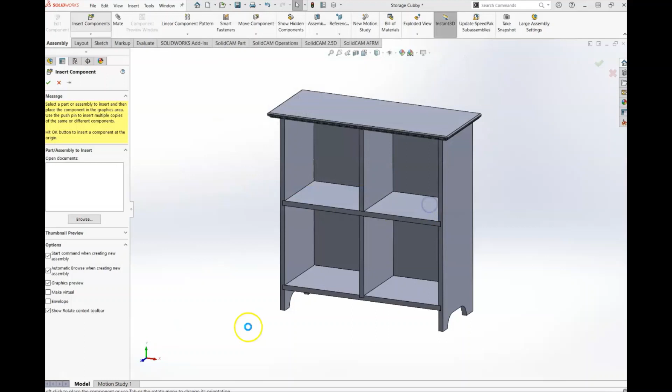The last thing that we need to do is put the face frame pieces in. So let's go up to Insert Component, and we need to find our face frame pieces. We should have 4 of them. So I'm just going to hold in Shift and select all of them and hit Open. And here I can kind of just place them in.

This is our horizontal one. This is our kick plate. Here's the vertical one, and here's the vertical that goes in the middle.

Okay, so the first thing that I'm going to put on is the easiest one, and that would be this tall vertical one. That's going to help us have our spacing, our tall vertical one. So it's going to be flush with the outside here.

So get your mate tool. We can click the wall that it's going to touch, rotate around, it's going to touch back here, green check. Outside to outside, so there to there, green check, and then the bottom to the bottom.

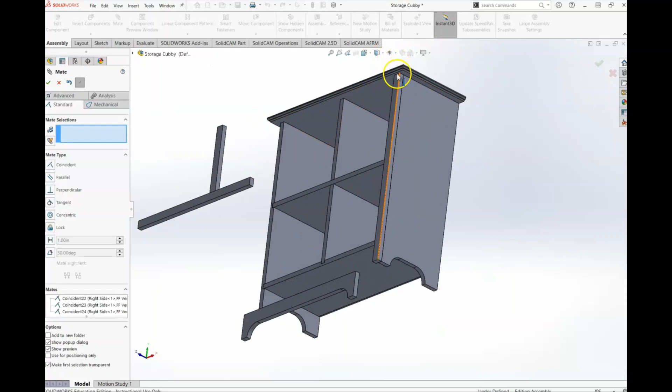And again, this hides that piece of plywood, hides the edge of the plywood. So now this is perfect, it's all set in there. So now we can put our kick plate, that goes right up there.

So the front of this to the front of this, green check. The side of it to the side that it's going to be touching, so it slides over. Then the bottom to the bottom, and it slides up in place, as you can see.

Now, like I said, this helped us with spacing, so we can put this piece in next. We'll do the front of the shelf, rotate around, do the back of this piece, green check.

You can do the front of it, the outside, like we were doing before. That's probably easier. So from there to here, it slides on over. Green check, and I'm not going to set a height yet, so it can only slide up and down. That's going to be determined by this spacing.

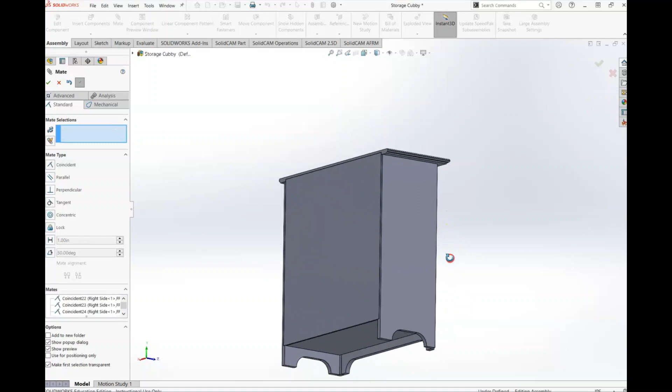So let's do this piece next. The front of that to the front of this, green check. Sorry, I'm at a weird angle here. So I just made the front of these even. This slides up, I'm going to do in between the two.

So we can either insert a new one of these, or if you hold Control on your keyboard, you click and hold on this part. Notice I'm not on the mate tool right now, and you just drag out. It does copy that.

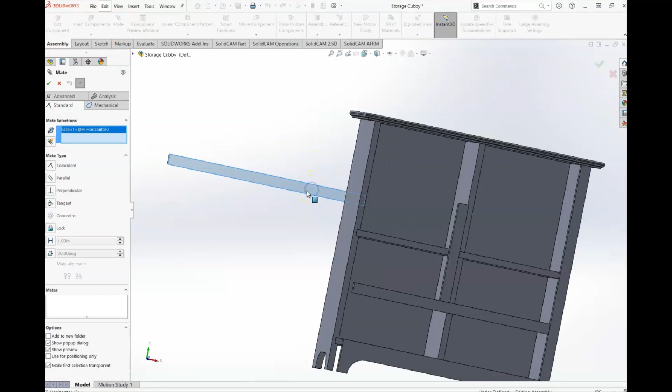So now we can insert that part, or mate that part. We'll select the front of that, select the front of this, so that they're even. You can rotate around, select the ends of these two horizontal face frame pieces. Drag this one all the way up.

And this is going to go in between, so almost like if you were acting like you were putting glue. So underneath and where it touches, green check. And now this entire piece is going to go up and lock into right there.

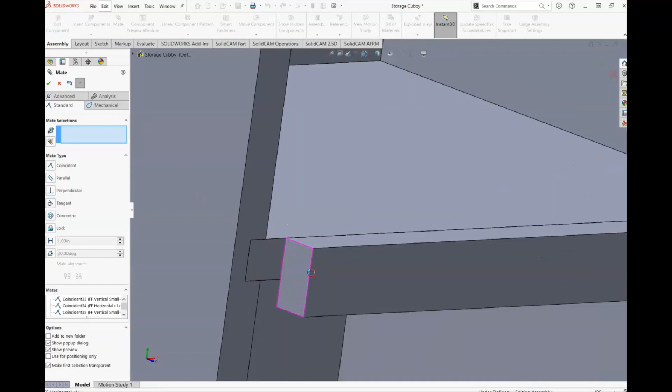So if you go underneath your top and on top of this piece, it will go up, green check, and you can see here it's perfectly spaced, so it gives you a little bit of overhang, and it's flush there as well, so you can slide something in or out. So this piece can still move left or right.

We'll do that towards the end. And we need our vertical piece here. So I'm going to get off my mate constraint, or mate tool, hold Control on your keyboard and drag the other big vertical one to this side.

And now we can mate that. So the front to the front, green check, outside of our side piece to the outside of this, green check, and then underneath. Almost looks like we know what we're doing. Everything's kind of perfect in here.

All right, so the last part that we need to do is bring this one in. So hold Control on your keyboard and copy that off. Go ahead and mate this.

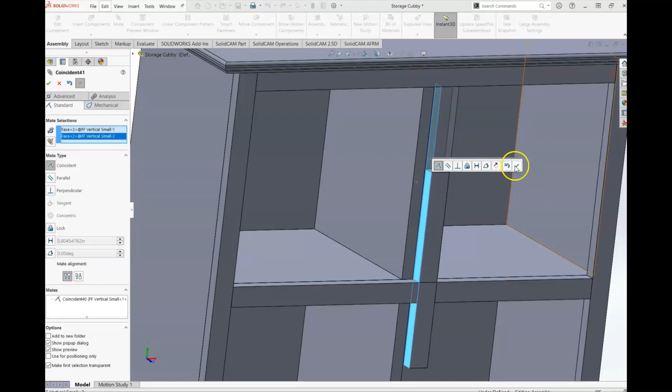So the front to the front, green check. We'll do the side to the side of these two. And then let's go down here and up underneath. So that piece slides down into place.

So now the only thing we need to do is center this thing up. To do that, let's look at how wide that is. So that's 1 1/4, okay? And the piece that it's blocking is 3/4 of an inch. So if you do that math in your head, $1.25 minus 75 cents, you have 50 cents left.

So if we need to split this and make this even, that means we're not going to line them up perfect this way. We're actually going to have to be offset on either side by 1/4 of an inch. So if I select this inside wall and I select the side of this, it's going to make them flush, but instead of hitting the green check, we're going to come over here and hit the distance tool.

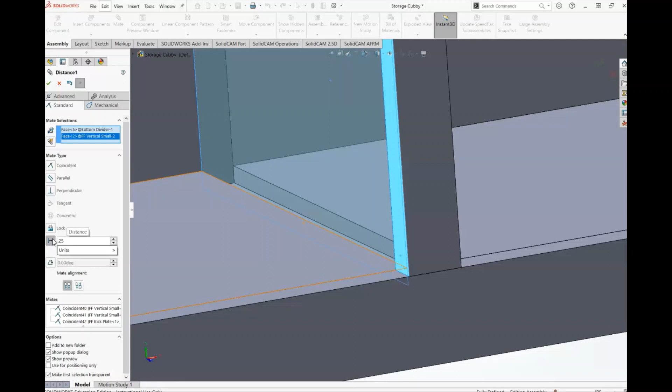Okay, this is offset distance, and we're going to set that to 0.25. And you want to make sure it goes the correct direction, that it's not way out here, that it is actually covering that middle divider, that bottom divider. Then you can hit the green check, and now that is centered.

And since we made the left side of the top one and the bottom one even, this is now fully mated. It's fully defined, and it's all finished. So let's save this assembly.